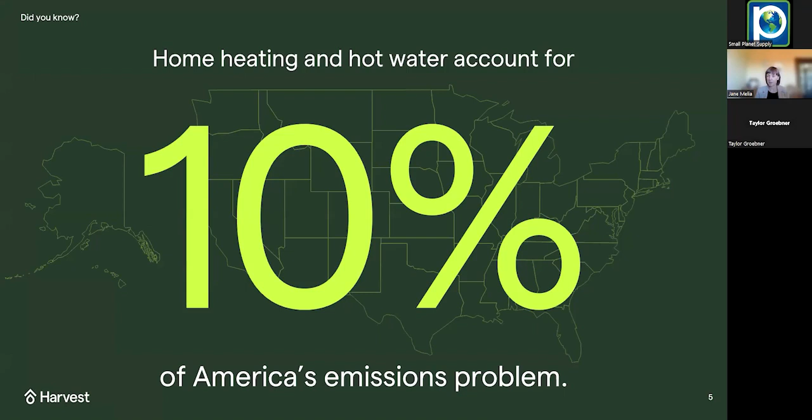Also, those 2 things, heating and hot water, for our homes represent a massive 10% of America's emission problem. So heating and hot water is both a high cost for our homes, it's also high emissions. And these are the 2 problems that Harvest is really tackling. So I'm going to share what we do and then share a little bit about the results that we've been getting. So what does Harvest do?

We deliver heating and hot water to your home, always using the cleanest and cheapest electricity. We built the Harvest Pod. It's a control unit, and this orchestrates third-party off-the-shelf devices. Some of you may be familiar with the Sanco2 heat pump, that heat pump water heater. We use that. We're going to operate it when electricity is clean, cheap, and abundant, and when that heat pump is going to be most efficient, usually in the middle of the day.

That Sanco2 is going to store energy in the tank that is carefully stratified, and we're managing its state of charge as a thermal battery. What that means is in summer, we may only need to heat 1/3 of the water in the tank, and in the winter, we may be heating it twice during the course of the day, all based on the expected load of your household over that coming 24 hours.

Now, one thing that's been added to our portfolio relatively recently is that the system is fully compatible with AC. And in fact, we can integrate with AC, but also with regular heat pump systems, which has the added boost of adding additional capacity if you're in a colder area or have a larger home.

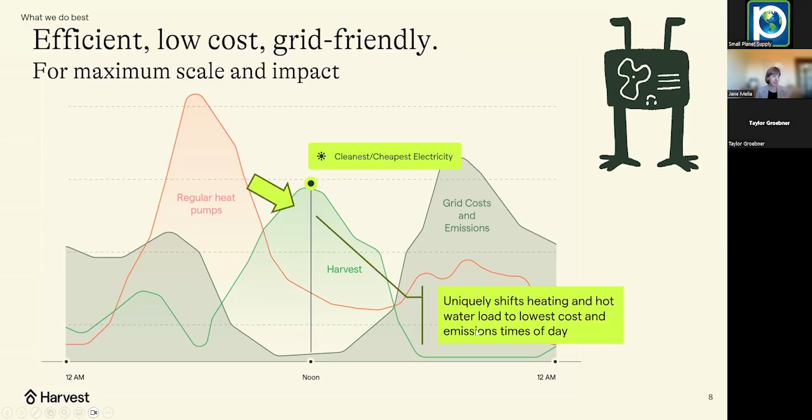So it's not all about emissions, it's not all about costs. A lot of it's about comfort, right? Because heating and hot water really is an anchor for our home and for the comfort of our family. And Harvest delivers there as well. We have a net promoter score of close to 90%.

Contractors also like the system as well. Effectively, this is a system that's very differentiated. It's delivering heating and hot water while saving money. It's saving emissions more than any other system. It's a relatively high-end system, but it captures more incentives and tax credits than other systems, which really help make it affordable for homeowners. And so we're onboarding more and more and larger contractors, and are always happy to talk to more and bring more on board.

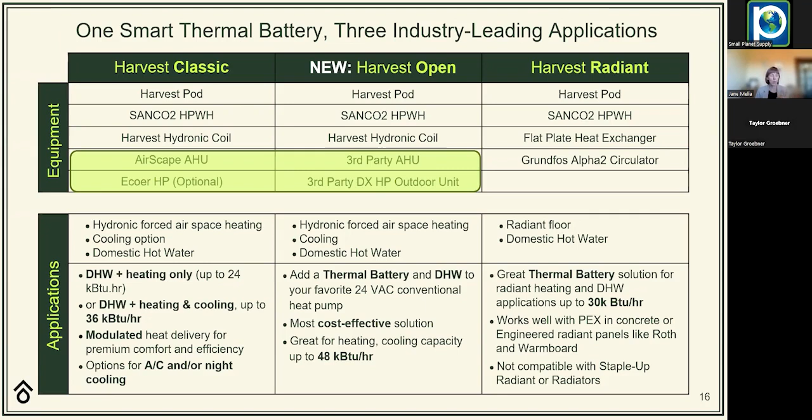Then, of course, the Radiant. This is a thermal battery solution for Radiant. So deliver Radiant, but we're always using the cleanest, cheapest electricity. You're getting your Radiant heating just whenever you need it. I wanted to share some examples because there are so many different configurations in homes, right? Existing homes, they're all a little quirky and everybody's got their own particular configuration. So I wanted to share a few examples of cases that we're seeing day after day.

So let's imagine you're a homeowner, you've got a gas furnace, you've got a gas water heater, you don't want AC, and maybe you don't even want AC in the future. The Harvest system delivers night cooling. We're able to use the economizer to bring in cool air in the evening, and maybe that's enough for your location. In that case, we recommend the Harvest Classic. It's a high-performance system. Use the AirScape air handler. We can use night cooling if you want to bring in cool night air or not, depending on your situation.

Now, let's imagine you've already bought a Sanco2 for your water heating, and you're really loving the experience it's giving you, but you're thinking, darn it, I could have deployed it with a Harvest system. Well, all is not lost. You can still do that. You can add the Harvest pod, either with the Open or Classic or Radiant configuration. You can use that heat pump water heater that you've already got to start to deliver heating with load shifting to your home through radiant or forced air system.

Let's imagine you've just bought a heat pump. It's delivering you cooling and heating, and you love the experience. And you still have a gas water heater, and you're thinking, well, maybe I could have deployed Harvest, but it's too late. Well, it's not too late. You can keep that heat pump. You can deploy the Sanco2 for your water heating and benefit from the high efficiency performance, the low GWP refrigerant, and a really, just great heat pump water heater.

You can couple that with a Harvest pod, and you're going to get the load shifting for the water heating, the load shifting for your heating. You can keep the cooling, and that heat pump is going to deliver supplemental heat on the coldest days of the year, or if you've got a larger home. And finally, if you've got a radiant floor and a gas boiler, yes, we can do that. Our radiant system works just really well for that.

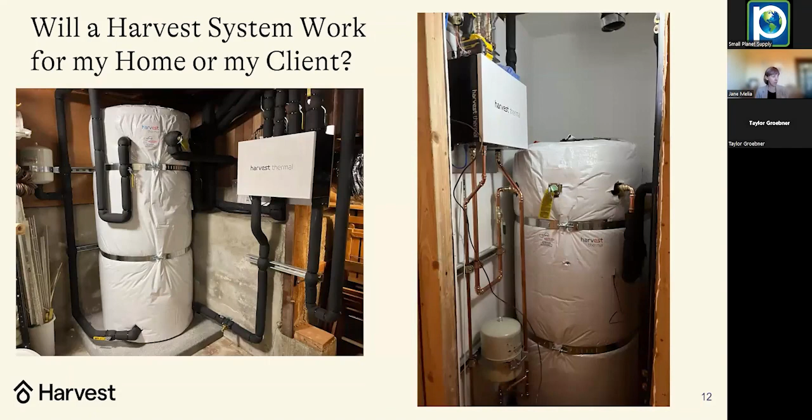Great. Our next one: the thermal battery / water tank must be considerably larger than normal if you plan on load shifting by 6 to 12 hours. What have you found percentage-wise you need to oversize the storage tank to make this possible? Yeah. So most of our homes are deployed with a 119-gallon tank. I'm just going to go back up to my image at the top. So this is a typical tank, 119-gallon tank. For smaller homes, we put in an 83-gallon tank. And for some larger homes who have space, they can put in a couple of tanks.

So that is bigger than your typical water heater, right? A typical water heater is going to be about 50 gallons. Although if you put in a heat pump water heater, which is a non-split system, an integrated unit, you've got the compressor on top, which is actually increasing its size quite substantially. The 119-gallon tank is larger, but it does fit into many, many homes, right? In the majority of homes, we're able to fit that in without too much difficulty.

One of the reasons we're able to do this with a 119-gallon tank rather than something larger is one of the characteristics of the Sanco2. The Sanco2 delivers water at much higher temperatures than a conventional heat pump water heater, 150 degrees compared to about 115 or 120. What that means is, let's compare domestic hot water delivery, right? If you need a shower at 115 degrees, and you're using a standard heat pump water heater, you have to deliver that water instantaneously, right? You can't dilute it because you need your shower to be at about 115 degrees.

With the water that we're getting from the Sanco2 stored at 150, we're diluting that 150-degree water with 60 to 70 degree water from the mains to get to your 115. What that means is you've actually got effectively twice the capacity than you would with a regular heat pump water heater. That's why a 119-gallon tank is delivering substantial load shifting. It's not going to shift you for 24 hours, but it's going to allow you to shift for several hours away from those higher cost, higher emissions times.

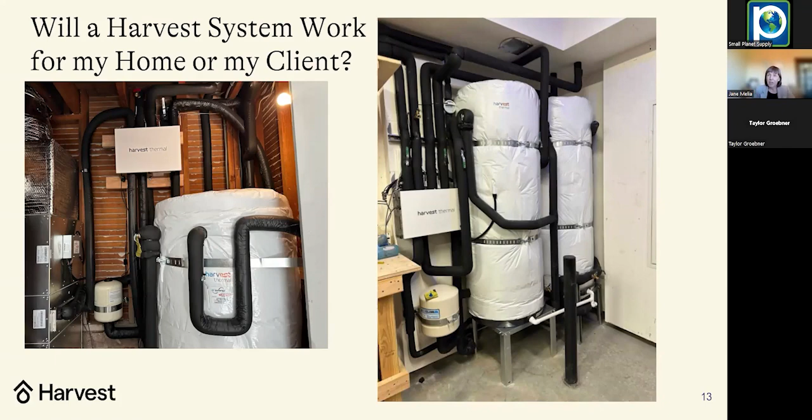Great, thank you. Is the Harvest still bound by the Sanco2's requirement of 25 gallons of domestic water each day? Or are you going to supply an 8K BTU hydronic system? So the Harvest system, actually I want to jump a little bit further on.

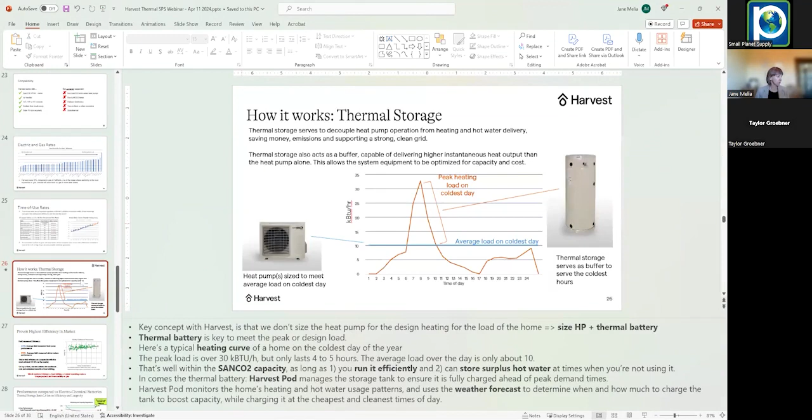So the Sanco2, when used, say, with the Taco X-Block without a smart thermal battery, is limited to a peak capacity, because if you don't know the state of charge of your tank, you have to be able to deliver heating instantaneously. So a traditional system with the Sanco2 is limited to about 8 or 10 kBTU in terms of heating capacity. And that's been a limitation.

Now, with Harvest Thermal, and I want to talk to this chart because this explains what's a little bit different about what we're doing. We're working closely with Eco2 Systems, and our system is fully warranted for loads much higher than that 8 kBTU. And this is why. The typical instantaneous output of a Sanco2 is going to be about 15 kBTU. You've got to reserve some of that for your hot water, so you've got to cap it to about 8 to 10 kBTU of instantaneous heating need if you don't have a thermal battery.

But what Harvest is doing is, in a way, decoupling the heating delivery from the heating generation by the heat pump. Here you can see in the orange line a typical load profile of a home on, say, a cold day of the year. And you can see it's very variable, right? You have a much higher peak at certain times of the day. This house would be, say, a 3-ton load just for a few hours of the day and maybe just a few tens of hours of the year. But most of the time, it's actually substantially less.

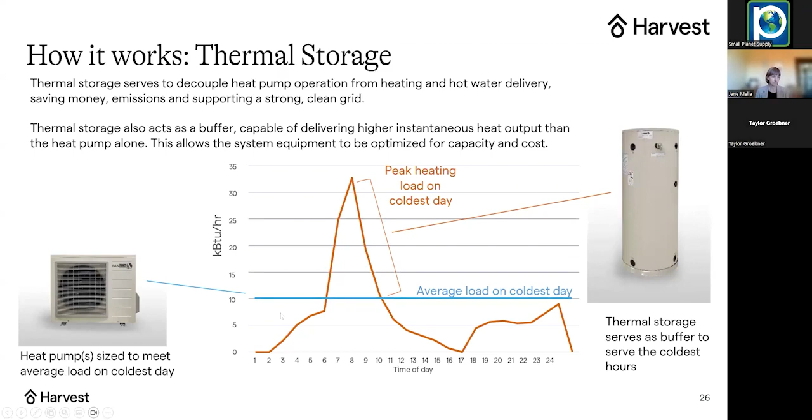Thank you. Next, my Carrier furnace went out. Are you saying I can buy a new gas furnace and your Harvest Thermal can work off of that? So not yet is the answer. If your Carrier furnace has just died, depending on the heating load of your home, my request would be to just replace it with a heat pump system. A Harvest system would be ideal, but a heat pump system, I'd be good with that, because we need to help homes transition from gas. Every gas furnace we put in today is going to stay there for the next 20 years. So it's better to transition if we can.

But if you do have a gas furnace, in the coming months, in 2024, we'll be able to keep the gas furnace, add another coil in the blower, and deliver hydronic heat, which is mostly going to be coming from the Sanco2. And then we're delivering supplemental heat from the furnace, maybe on the coldest days of the year, if needed.

All right. And then you've talked about this a little bit, but probably good to kind of bring it home again. If you want AC, do you always need to have a second heat pump? So if you want active cooling, traditional AC, yes. However, the AirScape air handler works as an economizer. It can draw in heat, draw in cool air.

If it's colder outside at night than it is in your home, it can automatically be set to draw in cool air and distribute it through your ventilation system. Nicely filtered, nice and quietly. And so you get that cooling. We see a lot of people, particularly on the coast, who are opting for that. Folks who are more inland tend to be going for the AC. And if you go for the AC, yes, you do need that second heat pump.

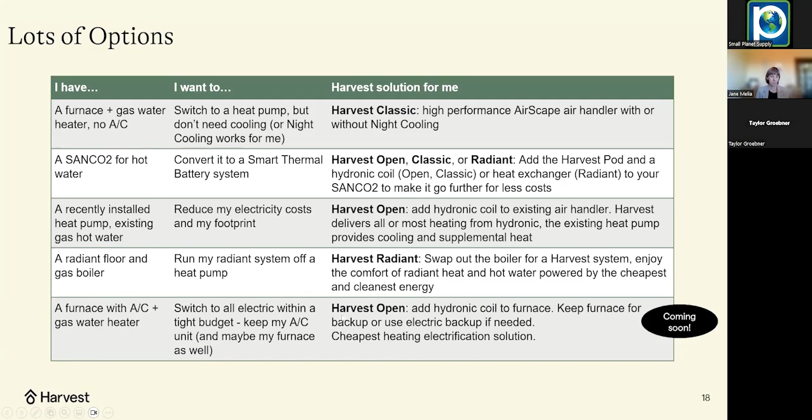Perfect. Okay, I got a two-parter, so give me a second to scroll to the second one. So first part is, I'd love to know more about the cooling side for use here in Arizona. And as a follow-up, what is the pod for cooling? How does it load shift the cooling side? I'm assuming the tank is the thermal battery, but that's always going to be hot for water and heating. And as a little note, installed Sanco heat pumps, they are amazing. Yes, I love the heat pump, so yes.

So the Harvest Thermal, what we're doing is load shifting for this 2/3 of the energy use, which is your heating and hot water. We are not today load shifting for cooling. That will likely change in the next 2 years. But today, what we're doing is focusing on these two parts of the pie. Because in a way, this is the bigger problem because this is a new load that's being added to the grid. Because this has conventionally been gas, and we're adding it to the grid, whereas AC has always been electric. So this is the real pain point for home electrification.

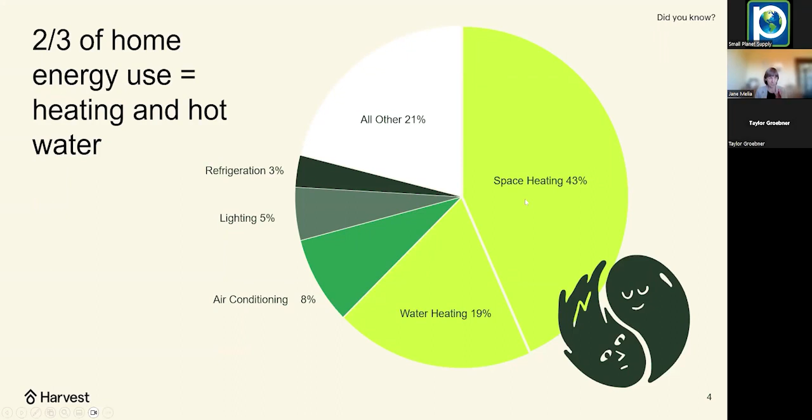It's taking this huge load, transitioning from gas and adding it at these worst times of the day, which is just when the grid has no capacity to do it. So this tank, sorry, I'm moving about a bit. This tank today is doing load shifting only for the heating side. In the future, we'll be able to do load shifting for the cooling. That will require a second storage device.

That could be either sensible heat, as in hot water, or it could be phase change material, as in you may be familiar with a Sunamp type device, and that will be integrated in the future. But right now, the big problem really is the load shifting for the heating and hot water. So sorry we don't offer it right now, but we had to focus on one thing.

Next question. Does the Harvest Radiant solution do radiant floor cooling? It does not. It is heating only.

All right. Do you provide an API to interact with the Harvest system? So we have an API for all our contractors to do the commissioning, and that allows them and us to be sure that everything is being set up appropriately at the start, and so that really just makes it easier for the contractor to install it. We will be providing a user interface for customers in the coming 6 to 9 months. Again, it's something that's been on our to-do list for a long time, but it hadn't actually made it up to the priority list. But it's something the team's beginning to work on right now.

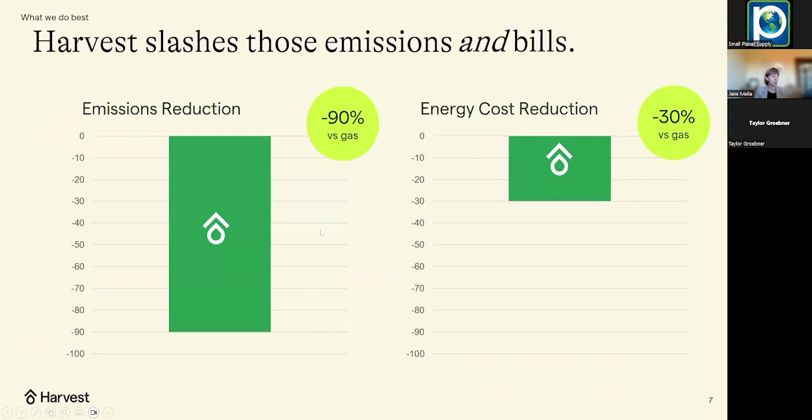So, I think the majority of homes are on the grid, but there is, I'd say, a modest minority of people who are interested in off-grid homes. Most of our homes are on the grid, drawing electricity from the grid. But the ability of the Harvest system to do this load shifting means that for that home, assuming you have solar, we're able to directly use the solar and maybe minimize the amount of electrochemical battery that you're going to need for that usage.

All right. Next question. I'm worried about a flood should the tank leak. One contractor said it should be ideally located outside. Would you agree? No. You can put it in a drain pan. Otherwise, it has a long life and I haven't seen any leaks. So now, if you have a beautiful parquet floor, maybe it's not the right place to put it.

But I have mine in my basement. Most people have them in the garage. They have them in a tank closet. You put it in a drain pan, but you really don't have much risk there. I would second that too. We don't really have that come up much at all or ever so far. Yeah, we haven't seen it.

All right. When do you anticipate expanding into Utah? So, as soon as time allows. We have a product now that's proven to work in a range of climates. And so the question is, what's the most effective way for us to reach customers?

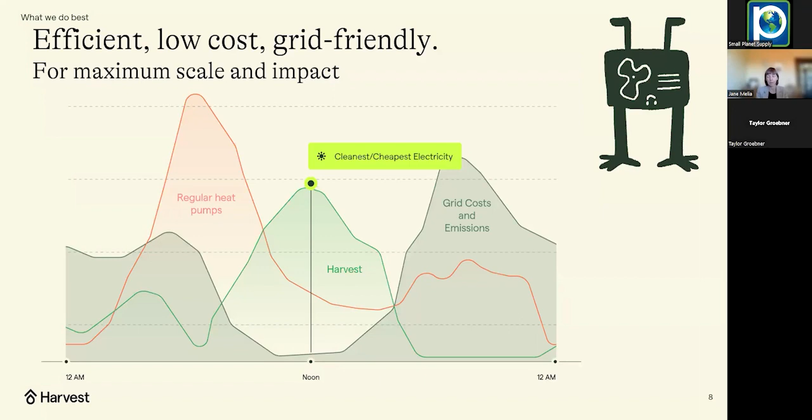have that integration. Essentially, whether it's from your solar or from the grid, in the middle of the day, that's when you've got the most solar electricity. So even if it's in excess of what you personally are generating, that is usually the best time to run your heat pump. It's also going to be a lot more efficient. In fact, I want to just go down and share a chart on that. I believe I have it.

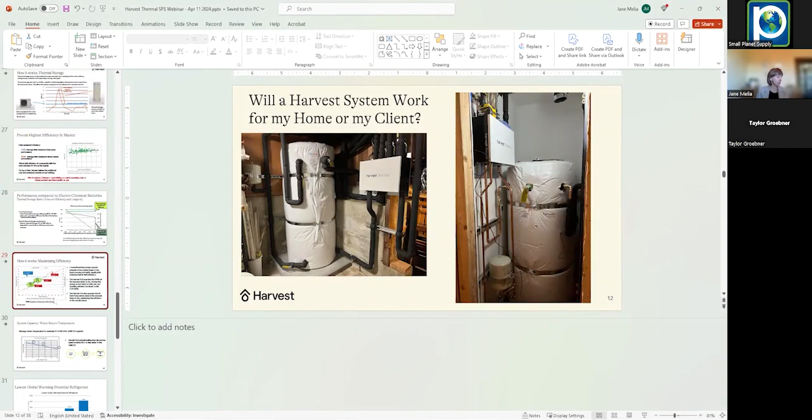Yeah, this is one of the big advantages of running in the middle of the day. Yes, there's solar, and even if you don't have panels on your roof, there's solar on the grid, but also being able to run it in the middle of the day means that we are gaining a couple of points or a point of COP, coefficient of performance, efficiency effectively, compared to what a regular heat pump that's operating instantaneously does. So we don't yet have that integration. We could do it in the future, but even if we exceed the capacity of solar, it's a good time to run that heat pump.

All right. Next question. Do you have a list of California contractors applying this system? Yeah, we have a lot of contractors, primarily in the Bay Area, but also Sacramento, San Luis Obispo, a couple in Santa Barbara. The best thing to do is reach out to us on our website. Contact us and send us your zip code, and we can put you in touch with the contractor who can work with you. Great.

Sorry, we got a lot of questions. I'm just kind of trying to wade through them.

Can you share your current scale, sales volume, install numbers? Yeah, so we've sold over 180 units now. We've got over 110 of those deployed in the field. And we're ramping up. We grew by a factor of 4 last year, and we expect to exceed that this year and maybe get close to 1,000 units by the end of this year. I hope that answered all the points of that question, Taylor? I'm not sure that I got it all.

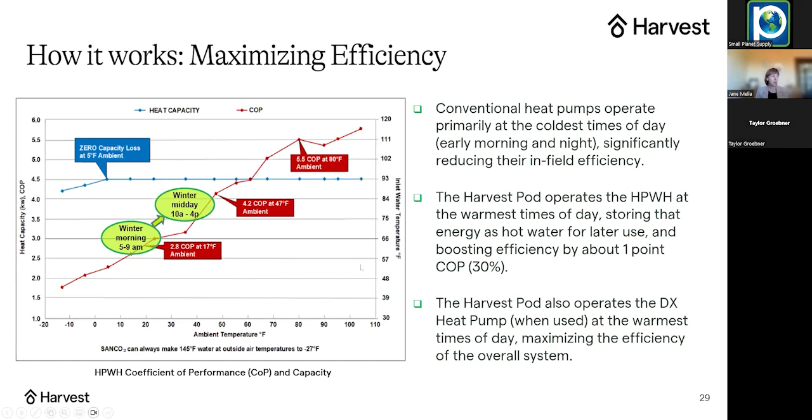In terms of grid profile, actually, I have another chart somewhere. Let me see if I can find it. Just bear with me one second, please. So the different grids have got different profiles, and it depends on the energy source that they're using. But we are seeing a trend towards more renewables coming on the grid, be it wind, be it solar, and that's adding an uneven profile. And then also, sorry, just let me share this. I think I've got a slide which is going to be useful here. Okay, so I'll move on.

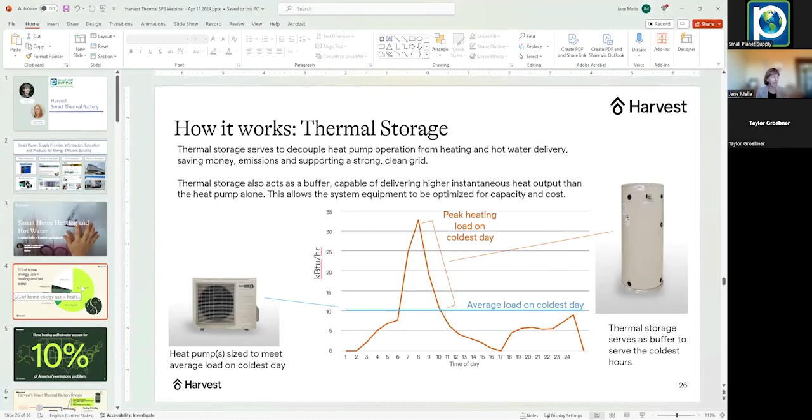But what we're seeing though is increasingly the peak loads are becoming that morning and that night as people are beginning to transition from fossil fuel usage to electric, adding load to the grid. And so while not all grid operators are in that situation today, that is a trend. And there's a report that I'd be happy to share in the backup material, just showing how that trend is evolving across the US and then further up north as people are adding that load in the night, in the morning, and as more renewables are being added at times which do not coincide well, and you get this

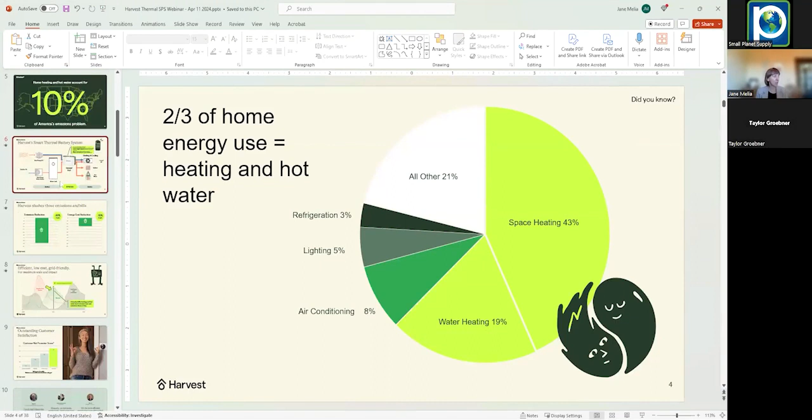mismatch. That's why a lot of grid operators are working on how do we add utility scale electrochemical batteries, which is one way to remediate that, but it's a really expensive way. With the Harvest Thermal system, you don't need an electrochemical battery because your tank is a battery. This is the most cost-effective way to deliver storage. Electrochemical batteries are great for electric loads, but thermal batteries are great for thermal loads. So while not every utility is in that situation today, that is a growing trend in more and more utilities. So a Harvest system is really future-proofing you as that change happens.

All right, thank you. The next question, will you be able to add a secondary coil from the Sanco in the air handler, for example, a Carrier? Typically, yes. In most cases, yes. Now, does that heat pump have a 24-volt control? That's the thing we're really looking for, or is it a custom control? If it's 24-volt control, we can pretty much always do that.

Then there's a question of space, right? If you don't have enough space to add that module in wherever your air handler is, that can be a constraint. But in most cases, it works out fine. So again, talk to us, talk to our contractors, and we'll figure it out.

Okay. All right. Someone else asked about this, but I'm not sure we fully answered. Sanco 2 recommends you use at least 25 gallons of domestic hot water per day to maintain tank stratification and efficiency. Yep. Does the pod manage this issue? Yeah. So Sanco 2 does not require that if you have a Harvest Thermal system.

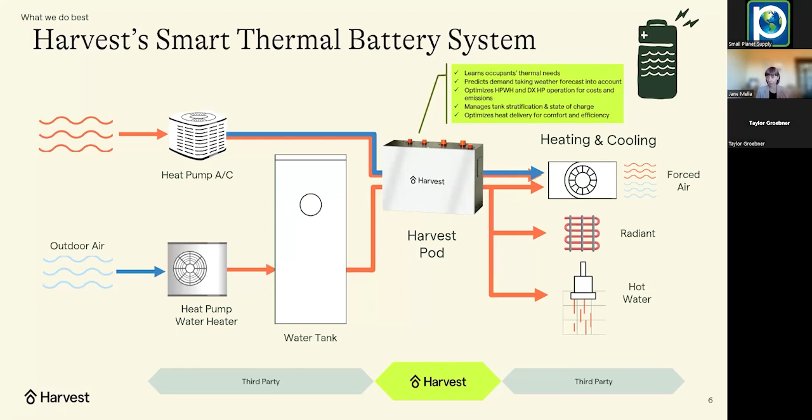So that 25 gallon usage for the SANCO2 a day is a requirement to allow them to deliver a cool return temperature to the SANCO2. The SANCO2's efficiency is highly dependent on managing the return temperature, and using 25 gallons is a way to do that. The harvest system, what we're doing is we're actually controlling the heat transfer through the delivery, and that's a large part of what the pod does. We're able to return water to the SANCO2 even without any domestic hot water use at 85 degrees Fahrenheit or less. And what that means is we are actually in the sweet spot in terms of efficiency.

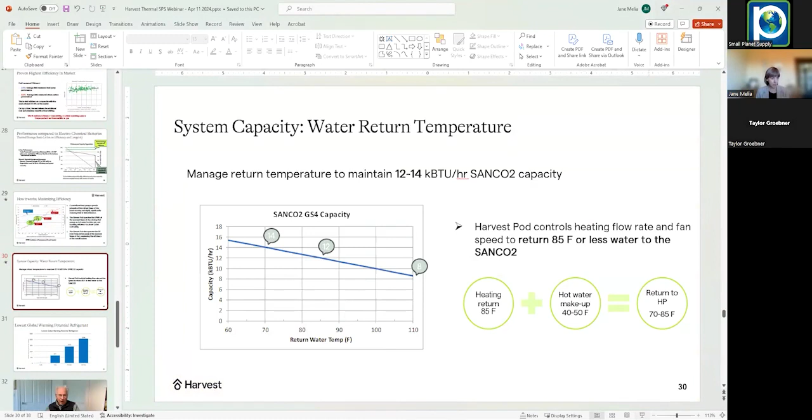Let me go to a chart where I've actually got that here. So this is why that 25 gallon usage, which is really to make sure that you're getting a good return temperature to the SANCO2, is not necessary with the harvest system. That's necessary with other systems where they're not managing the return temperature. With the harvest system, we're delivering cool water back to the heat pump anyway. So that's not a requirement. So you use the hot water that you need to use. You don't have to use more if you have a harvest system just to meet an arbitrary goal.

All right, thank you. I'll let you answer this, Jane, and then I'll potentially have some stuff to add on to it at the end. I don't know where this person's located. Are there any display harvest systems available to see? So, Taylor, I'll let you take the case for your territory. Yeah. We do not have any display units. If you're in my area, I'd be happy to show you the one in my home. And that's always a pleasure to meet people who are interested in the device, but we do not have this display system.